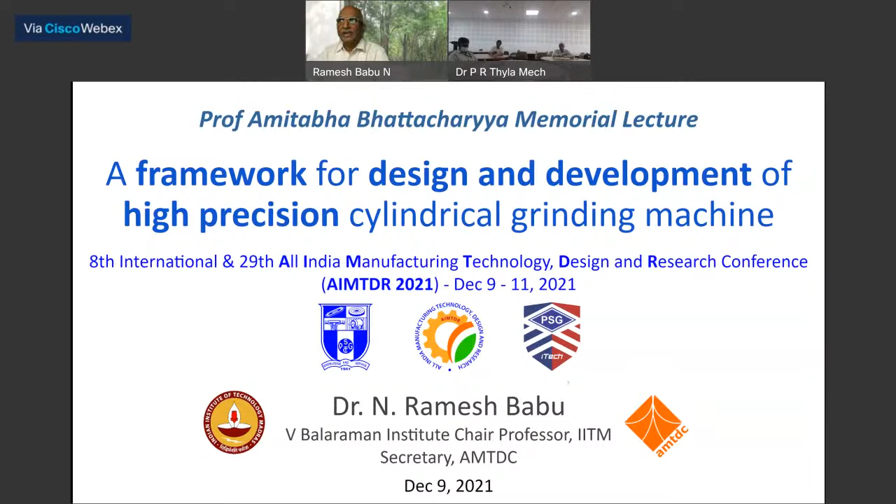I'm really honored to have you as the chairman of this particular session. I just wanted to briefly say a few things before I go into the talk, which I'm going to deliver in the next few minutes. At the outset, I express my gratitude to the organizers of the AIMTDR conference for having invited me to deliver the Professor Amitabha Bhattacharyya Memorial Lecture at the conference being organized by PSG institutions. I consider it a great privilege and thank all my colleagues for bestowing this honor on me.

According to me, the memorial lecture should really try to extrapolate, to the extent possible, what Professor Bhattacharyya would have said had he been with us today. I had known Professor Bhattacharyya as an eminent teacher and a distinguished researcher in the field of machine tools and production engineering. I happened to see him only once, at the AIMTDR conference in 1988, held at Jadavpur University. I have come to know that he had vast experience across a wide spectrum of activities, ranging from engineering education and research, through planning and developmental work, even to administration and management.

His research efforts in metal cutting and machine tools are very well known through the textbooks on metal cutting theory and practice, and principles of machine tools. These books are still considered among the best and are read by undergraduate and postgraduate students.

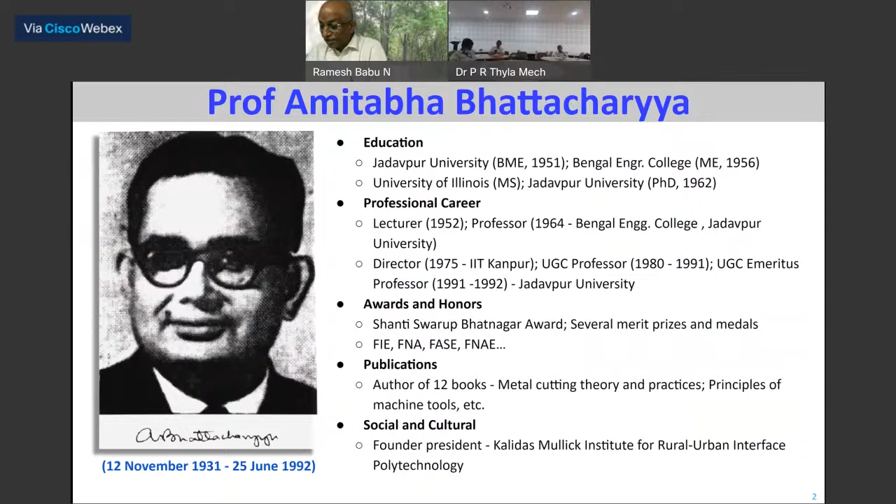I'll give an outline of today's presentation for the next 40-45 minutes. I would like to give a status of developing technologies known as mother technologies and mother machine tools, based on the report brought out by IMTMA in 2020-21, which is the basis for my introduction.

There are several other reports made available to us in the open domain, which one can easily look at. I'll briefly touch upon those, and also the efforts of many experts whom we have seen today as Lifetime Achievement Awardees, who have contributed immensely to bringing out those reports and the roadmap for the machine tool sector.

Then I will get into the project on which I have worked for almost 5 years, to develop the framework for characterizing the machine tool, and then use that same framework for developing this machine into a high precision machine tool.

This has actually taken us to the level of transferring the technology, and it was funded by the Principal Scientific Advisor's Office, with the team advising us and monitoring the activities from time to time.

At the end of this, I would also briefly talk about the transformational change we have brought about by setting up an Advanced Manufacturing Technology Development Center at IITM Research Park as a separate entity, and tell about the advances and changes we have been making in this area.

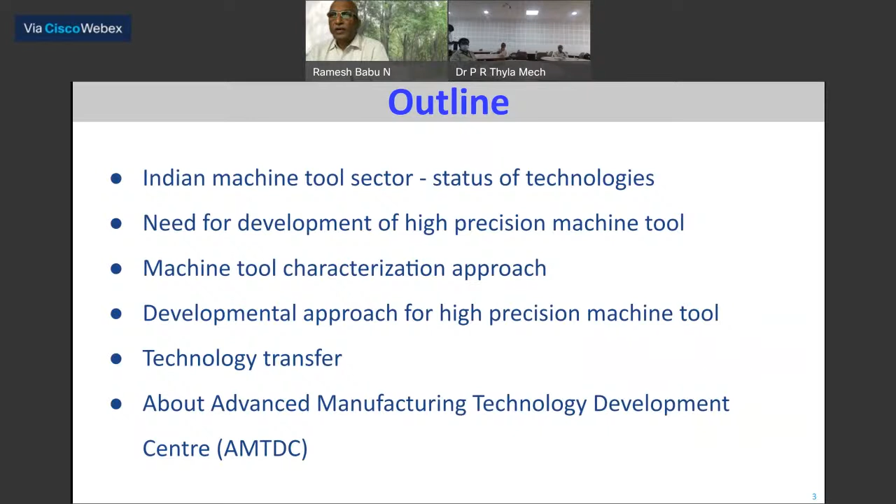This report I have taken from the IMTMA annual report, wherein they clearly brought out the level of dependence on imported technologies. These technologies are needed for building machines of different grades, right from the normal production grade used routinely in job shops and workshops, to precision and high precision machines.

In all these machines, what we need are certain technologies known as the mother technologies. They range from electrical, mechanical, electromechanical, and hydraulic, etc. I'm not getting into the details of them.

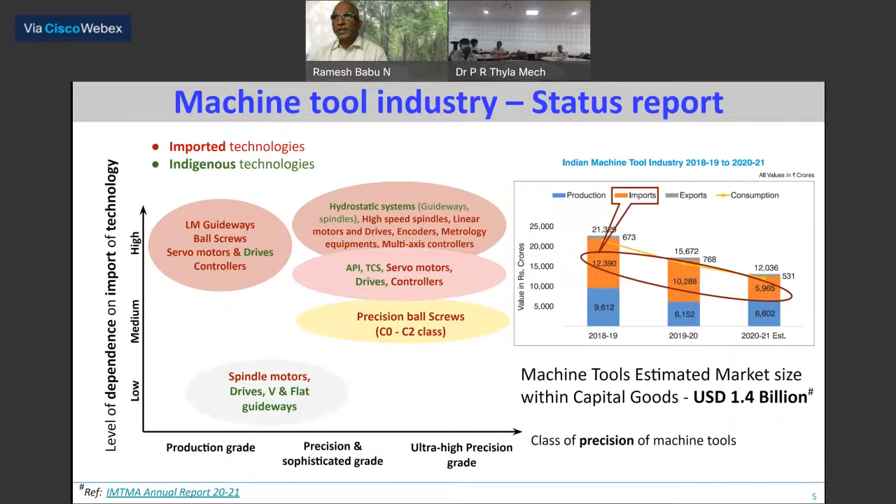So what it clearly brings out is that we need to really look at the way that these technologies are made available in this country to make these machine tools affordable by many, right from the low end to the high end machines. I think this is the basis.

If you look at some of the reports brought out by the Planning Commission under the 12th Five Year Plan, they have stressed the need to increase the depth in technology by way of industry-academia collaboration. Unless the academia looks at the problems of the industry and intensely takes it forward, we will not be able to build this sort of supply chain.

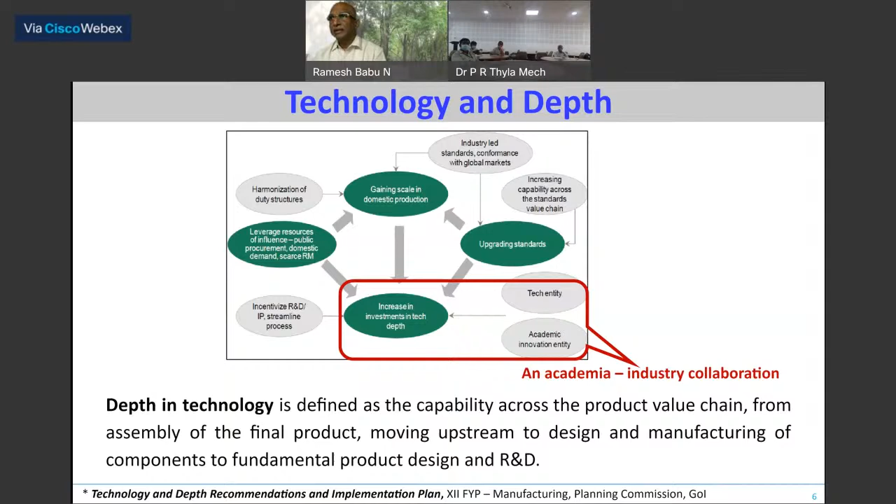That can look at design, manufacturing, and finally assembly and technology transfer. That's where the efforts are going on at the moment, and some of these efforts have been brought out in the technology roadmap, which clearly identified several technologies that need to be developed in this country. I'm not getting into those details, but those interested can easily look at this technology roadmap, which was brought out by the PAC and steered by members like Mr. Mohan Ram and Professor Mehta and others.

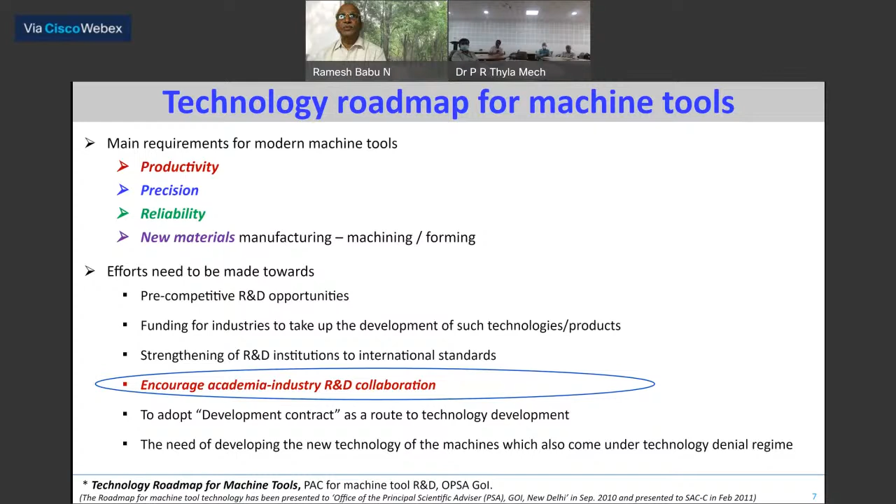One of the points here is to encourage academia-industry R&D collaboration for building the machines of the next generation, wherein productivity is extremely important apart from precision, reliability, etc. This particular presentation falls into one of those categories of building high precision machine tools.

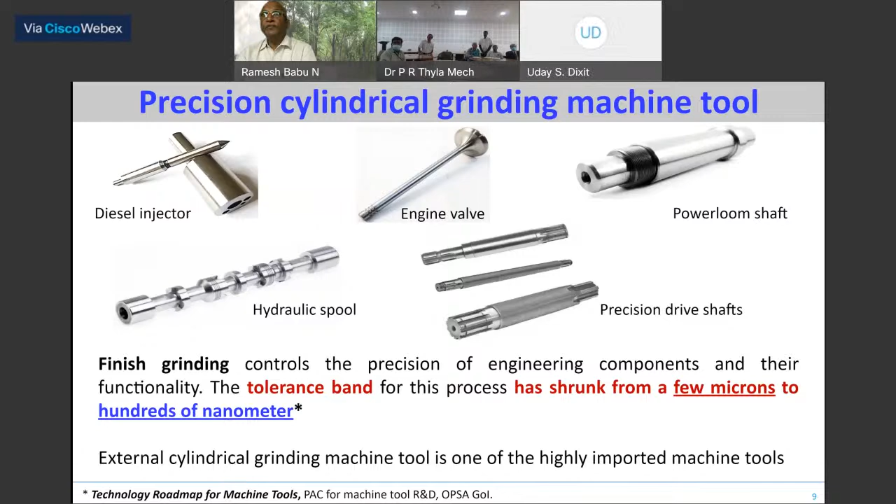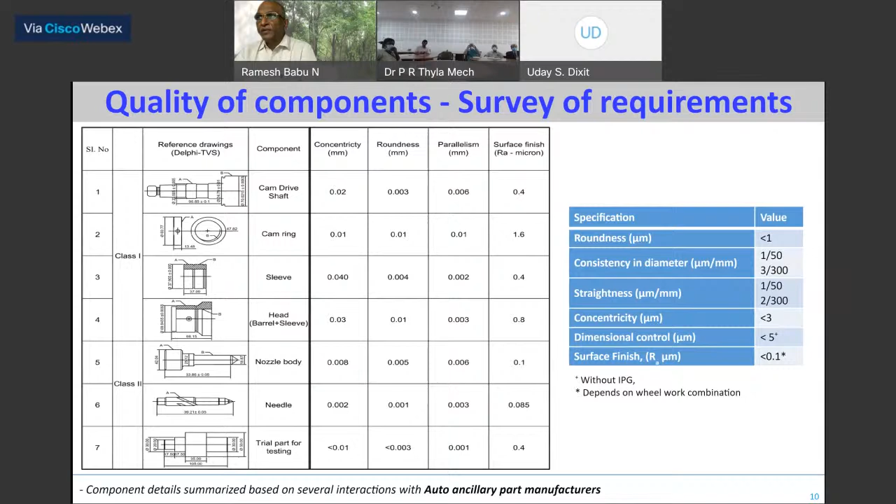That has really made us think of a grinder that needs to be either upgraded or modified into a next generation precision grinder. This was done in a collaborative mode with industry, academia, associations, and various other stakeholders who use these machines.

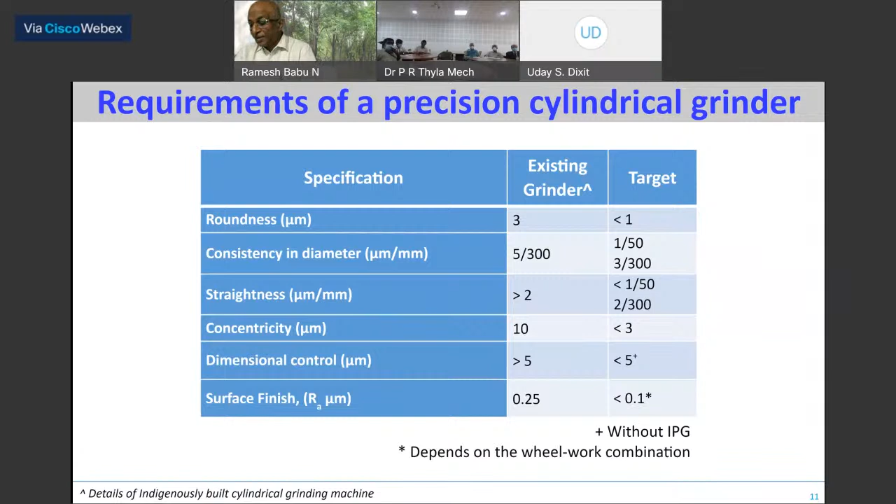That's where you can see the set of specifications known as the targeted specifications listed out in this table. As you can see, the roundness and concentricity are far lower than what we were producing in 2010-11. This was a project of almost 4 to 5 years duration, interacting with many industry partners and stakeholders who tested these machines and proved these concepts. The CMTI and the AIMTDF also played an important role in supporting this activity.

When we started, we were not very clear of what we had to do and how we had to proceed. But the industry partner, Micromatic Grinding Technologies, was kind enough to give us all the details which they had in building the machine. Our team worked with their team very closely and then brought out this anatomy as a building block, which can be used for subsequent projects also.

I'm not getting into the details of each and every module, because most people familiar with these machine tools know that the machine tool requires a bed, and over that a table and carriage, and on top a wheel spindle head, then the work head and tail stock, and of course the tooling. If that is the basis for making a machine tool, each and every unit is extremely important if you want to build the precision machine of the order we stated in the previous slide.

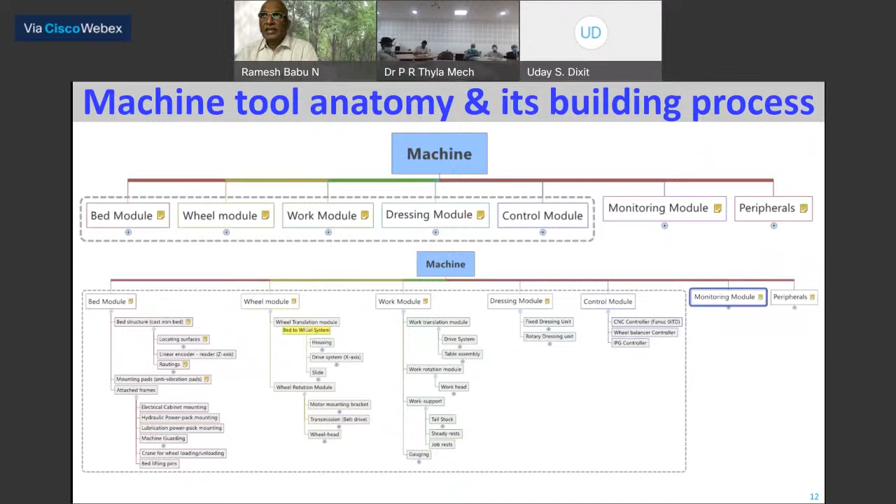So I think we felt that unless we characterize the existing machine and find out its weaknesses, and then benchmark it with a precision machine giving out the specifications indicated in the table of my previous slide, we need to bring that sort of an approach if we wanted to really build the next generation machines.

So what you see here is the effort that has gone into characterizing this machine. Grinding is a very complex process, with many inputs needed to realize certain precise outputs on the parts. This particular machine is a cylindrical grinding machine, where the tool and work interaction is extremely crucial to make the system precise and robust.

So let me use the pointer to bring out some of these. You can see the various inputs such as the mechanical system plus the tooling, and various other parameters such as the grinding and dressing parameters. All of them influence the quality of the part produced by the machine.

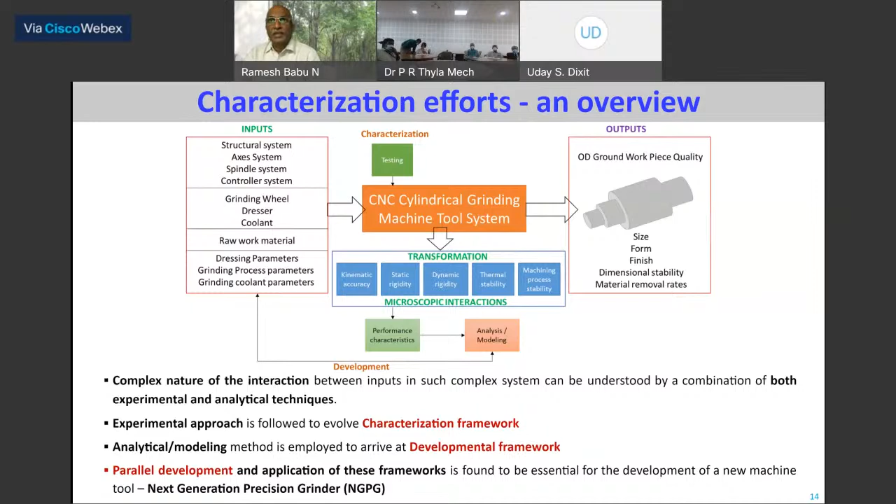I think this framework not only helped us characterize and identify the weaknesses, but also helped us use it for developing the next generation machine. I'm going to present some of these thoughts and efforts in the next few slides. So if you look at it as a black box, you will see there are certain inputs and certain outputs expected from a machine of high precision.

Inside this black box, you see the process happening between the workpiece and the cutting tool. This interaction is captured by way of four blocks, like geometric accuracy, the volumetric accuracy of the machine in the work volume, and its mechanical and thermal stability, or thermal rigidity.

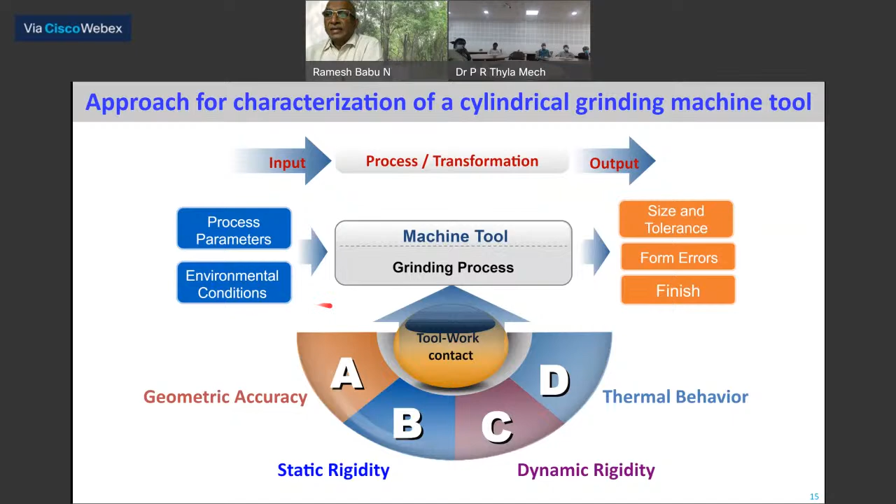These are the aspects which are seen to be extremely important if we wanted to transform this into a next generation machine. That's where the extensive study and analysis was made on the machine with only two axes.

But then, if you look at the bed from bottom, you have a table assembly, then carriage assembly, then wheel head assembly, then workhead assembly. These are the assemblies which use several components, and each component has to be machined very precisely. We need to follow certain assembly practices to produce those units in a very precise manner.

The information I have provided here is basically to find out the volumetric error in the work volume, which required both geometric as well as kinematic measurements. That means the error in geometric positioning, angular positioning, etc. Whereas kinematics means how the various units are assembled to bring out the parallelism and also the perpendicularity.

That required various measurements using laser interferometers and other instrumentation, and that will only give you accuracy in the static sense. But when you're operating this machine, depending on the conditions and material removal rates, both the static as well as dynamic rigidity or compliance of this machine also plays a vital role in affecting the precision.

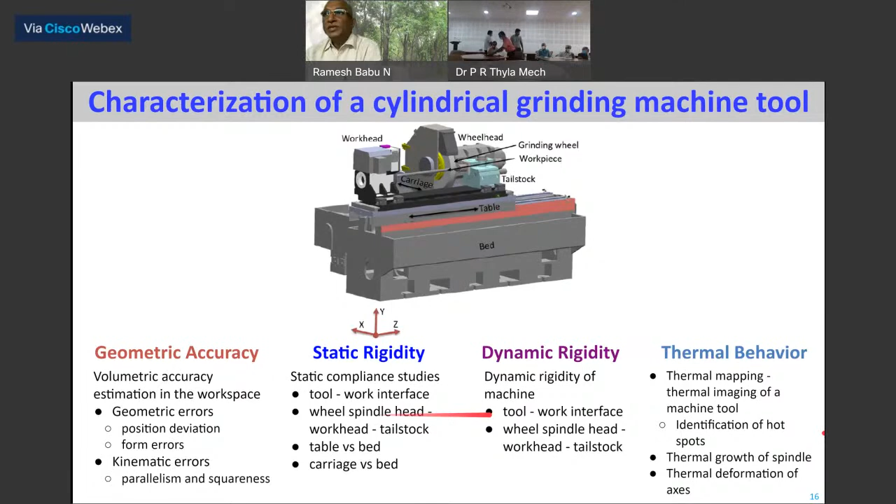The spindle and the axis are the ones actually moving the work and moving the tool, so the spindle growth is also very important to measure and compensate for. A lot of work has gone into this through a series of studies and efforts. These are the various aspects one needs to consider to really make a machine of high precision.

I just wanted to give you a flavor of what we have done, how we identified the weaknesses of the existing machine. This data relates to the existing grinding machine produced by the machine tool builder in 2010 and 2011-12. We found that the positioning accuracy itself is about 1.6 microns over 300 millimeters. But we are aiming to build a machine with less than 3 microns, less than 5 microns. You can easily imagine these accuracies are not going to produce high precision components on this machine.

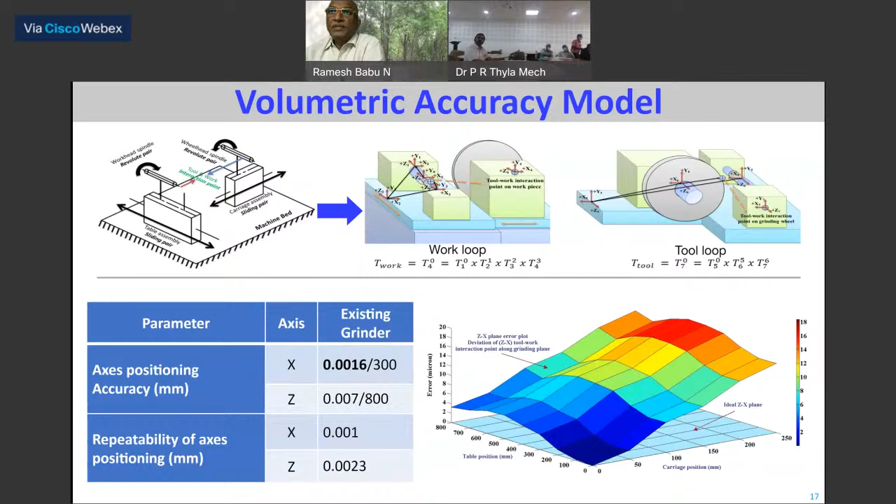So we took this information and attempted to build a model which is helpful for us to do sensitivity analysis and identify the root causes for the inaccuracies. The same thing will also help us improve those areas where precision as well as accuracy can be enhanced. So that's one side.

Then the other one is the thermal characterization. While characterizing this machine, we found that no two results are similar. We found that the drift of the spindle and the growth of the axis give very different results from time to time. This really made us look at it in a holistic way, and we see thermal characterization as the most important and crucial aspect in precision machining and precision machine tools.

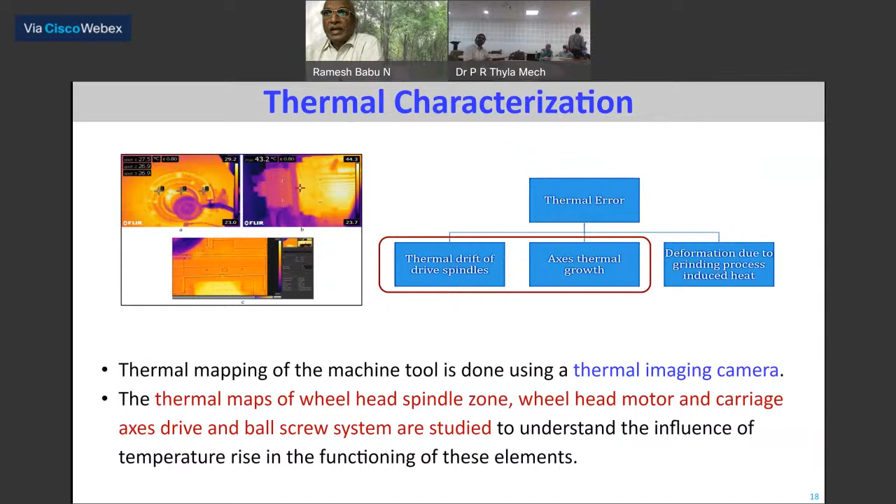This is where one would notice that if you look at this sort of error, about 15 microns is the error. You can see the growth with respect to time - it took almost 300-odd minutes for the entire temperature on the wheel head to come to a stabilized mode. T1, T2, T3, T4 are the points on the wheel head housing, and when we monitored the temperature, we simultaneously monitored the drift of the spindle.

We monitored this using the spindle error analyzer. We found that in the existing machines, it takes about 3 to 5 hours for the machine to get into stabilization.

I think that's going to be too long, so we felt that we need to reduce these times also if you wanted to utilize these machines more usefully.

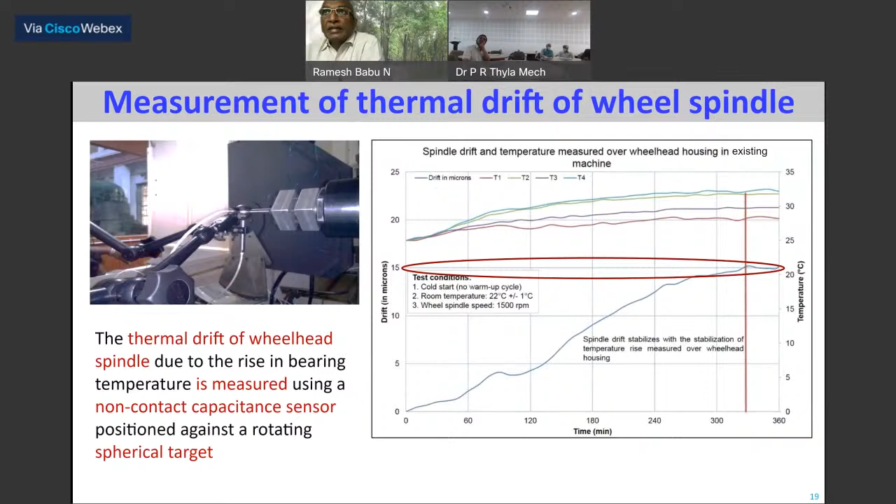I think the second one is the drift which I mentioned on the axis itself. This is only a 2-axis machine: one along the table and the other along the carriage. These two axes we monitored.

We also saw that the wheel spindle head itself is driven indirectly by means of a belt drive, and that is really causing this entire carriage and the other units to have this sort of deformation.

The first two, like volumetric accuracy, which used only the geometric and kinematic error, gave us some information about the machine and its behavior. But the thermal characterization has thrown more insight into how the machine is behaving, due to the construction and the way the various units were placed. These are the insights we got by means of the study.

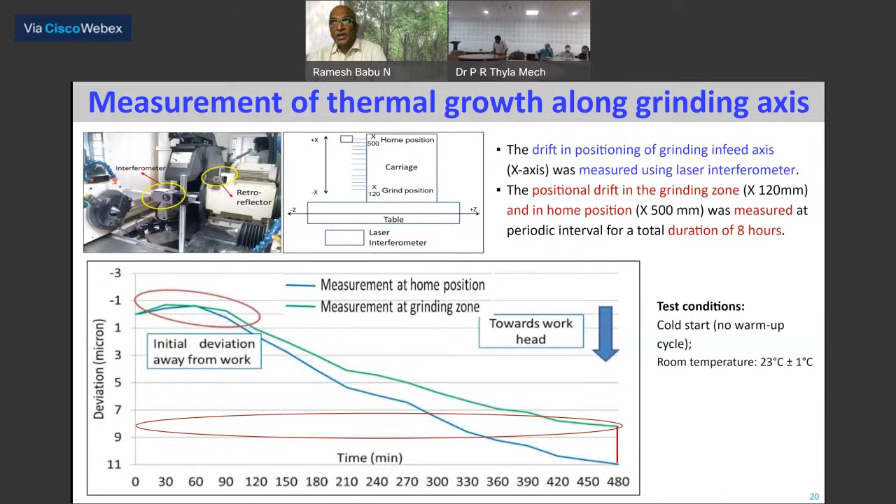But then we thought that in order to have completeness for the project, we also felt that the structural and mechanical rigidity of the system has to be assessed. So we carried out certain tests, and some models were built to provide this as the base framework which can be used in the inverse mode to come up with suggestions.

Though the dynamic studies have not offered much, it was still useful for us to conclude that the machine base and the other units have enough rigidity for the machine to withstand all those loads and the speeds.

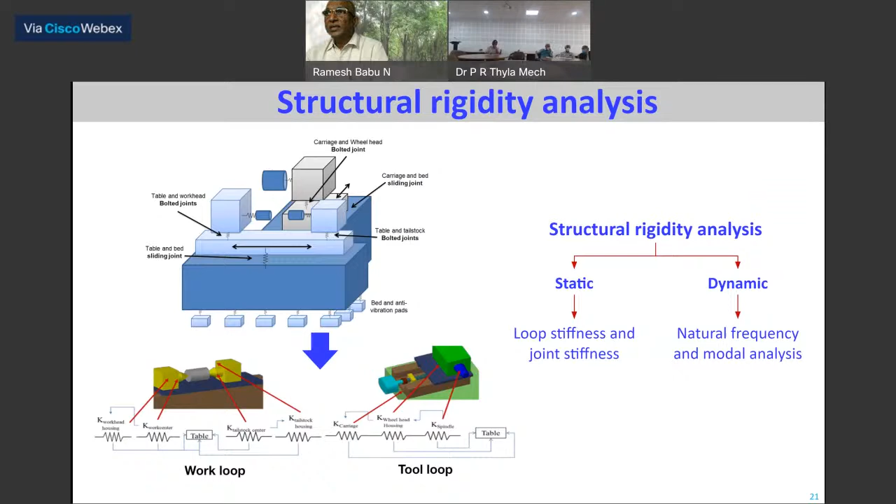Now, of course, during this process, we did develop some models that identified the manufacturing practices being followed by the machine tool builders in terms of the tolerances and allowances provided on various components.

Some of the models are basically tolerance stack-up models and tolerance synthesis models, which help us allot the tolerances on different components of each assembly, such as the wheel spindle head assembly and work head assemblies, etc.

At the same time, this model incorporated the various mechanical properties of the components and joints and the various units which are moving in relation to each other. That also gave us some confidence on how to really design the systems.

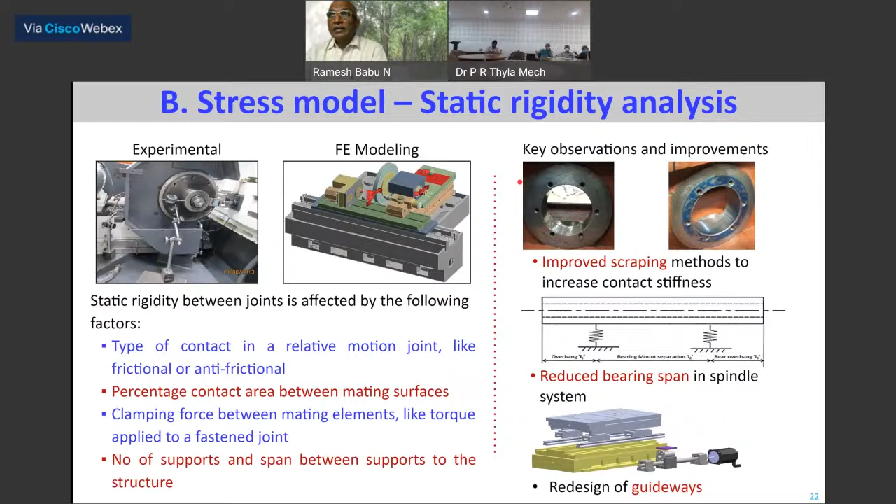I think the dynamic rigidity, as you can see, we developed this sort of finite element model to ensure that this model can help us in the future.

At the same time, with experimental modal analysis, we gathered data about the machine and the machine structures, using the standard methods of the hammer with accelerometer placed at different locations. We found from this data the mode shapes at different frequencies.

Normally the spindles are operated at about 3000 to 5000 RPM, so the frequencies will be in the range of 50 to 80 hertz. It's only a rigid body deformation without any bending or twisting. Hence we concluded that this machine has good rigidity as far as the mechanical properties are concerned.

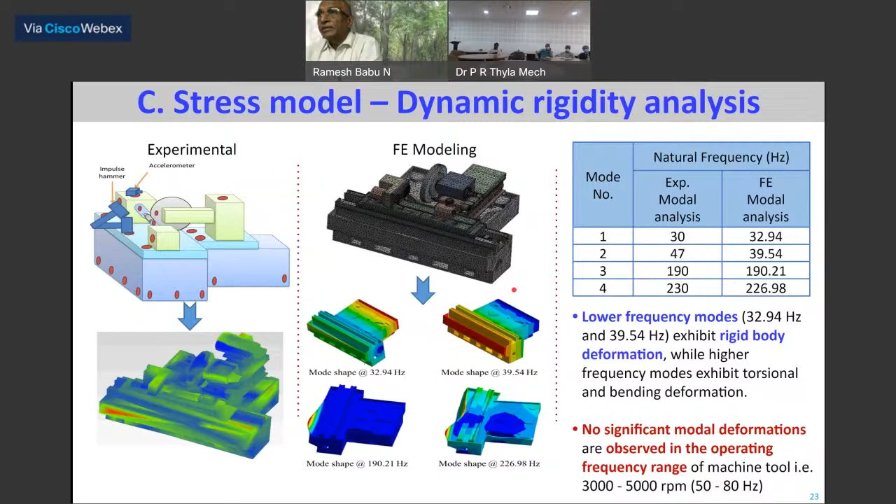So the entire effort is basically to characterize this machine and identify the various areas that can be improved.

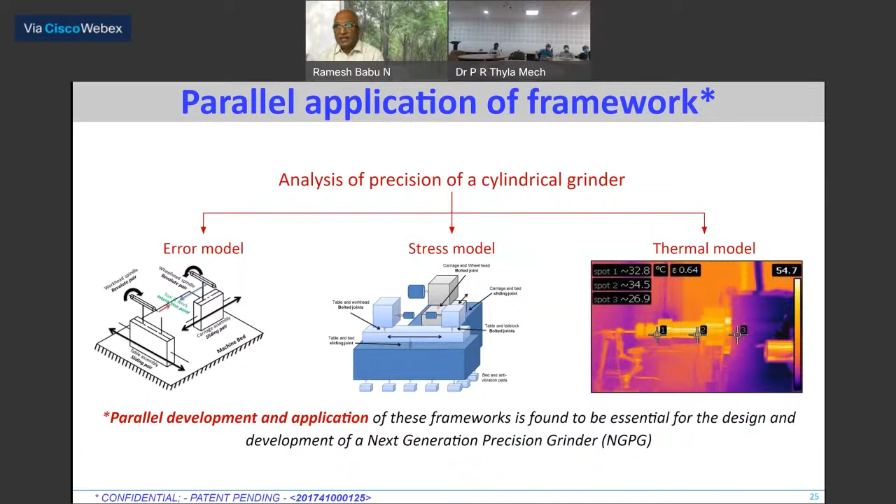We used the same approach to build several models and integrate them into a framework, bringing them into different categories such as the error model, where volumetric accuracy is the main concern, the stress model, where static and dynamic compliance of the machine is of utmost importance, and the thermal model that covered both the drift of the spindle and the axis, so as to plan and implement those compensation strategies.

We can also identify the major components that affect volumetric accuracy through sensitivity analysis. This particular error model really helps us identify the areas of improvement, and that's where we came up with suggestions on the design and assembly of various units.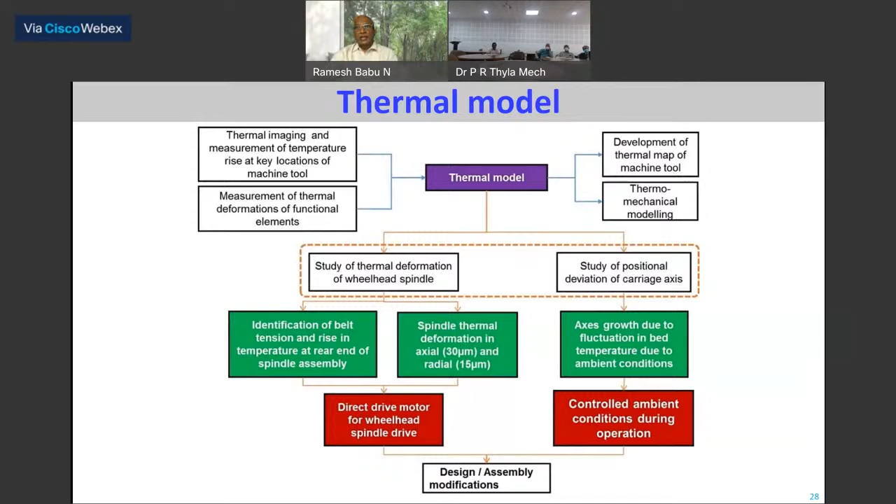This entire effort is essentially a combination of both experimental and analytical methods, which we don't normally do while taking up any project. Usually we look only at factor improvement methods—if we improve stiffness or thermal stability, these are seen in isolation.

But this particular project dealt with all the components of both static and dynamic aspects of the machine tool, which made us build this framework and helped us come up with suggestions. These suggestions were implemented, and we tested the machine after it was fully built.

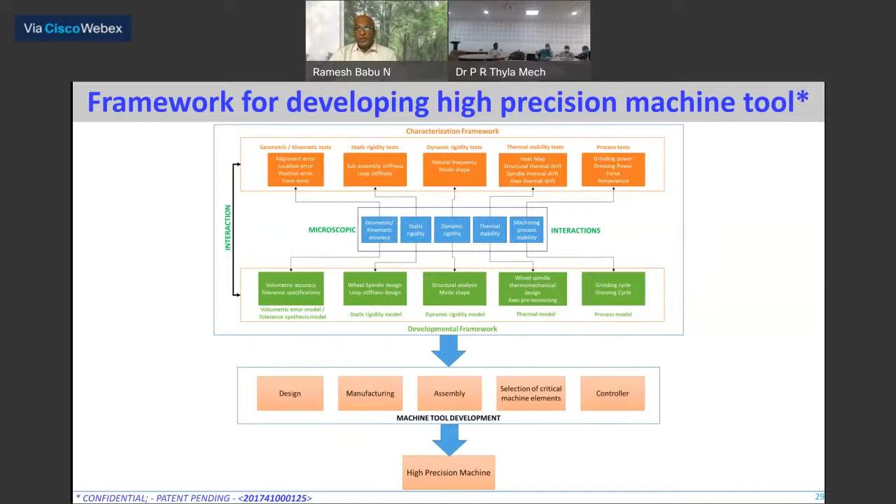Even the trials were carried out in an exhaustive way before the entire machine was proved to be a high precision machine. Now I'll show you some of the suggestions we came up with.

If you look at the diagram on the left hand side, about 75% of the errors are due to thermal drift—this is only the spindle drift itself—but axis positioning error is about 20%. The errors due to other things, such as static and dynamic compliance of the machines and process related factors, are very, very low.

This suggests that we need to focus more on thermal compensation aspects over other aspects. We also suggested certain changes in order to make these machines easily reproducible.

One thing we noticed is if you use V and flat guideways, the time taken for scraping and making alignments takes more time. So we felt that linear motion guideways could really reduce the time for building this machine tool.

The ball screw pretensioning has reduced deformations to a certain extent, and the direct drive spindle has also helped reduce deformations caused by the overhanging of the motor driving the wheel head spindle.

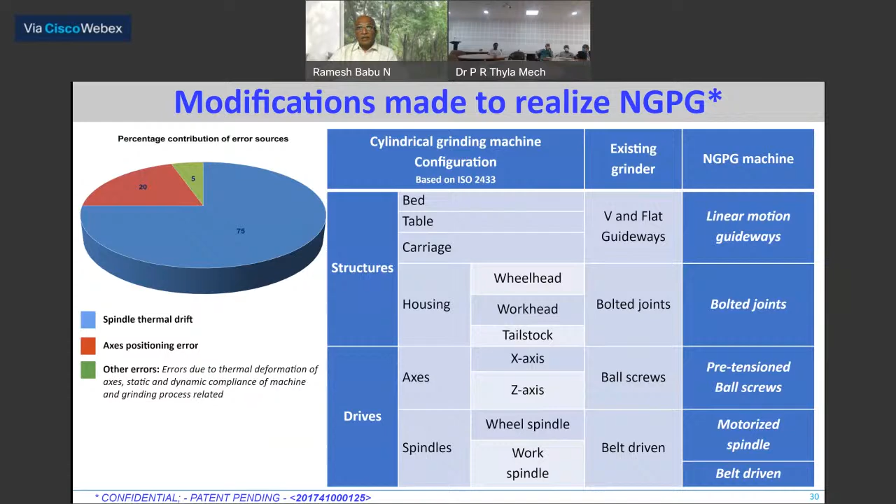This is the machine that was inaugurated by Dr. Chidambaram, who was the principal scientific advisor at that time.

We further evaluated the various parameters in order to bring out a comparison between the next generation precision grinder versus the existing grinder.

This table clearly shows that axis positioning errors have been brought down from 1.6 microns to 1.9 microns. Similarly, in both axes, the backlash was also brought down to 0.2 microns, and the step response using the LM guideways has also significantly improved.

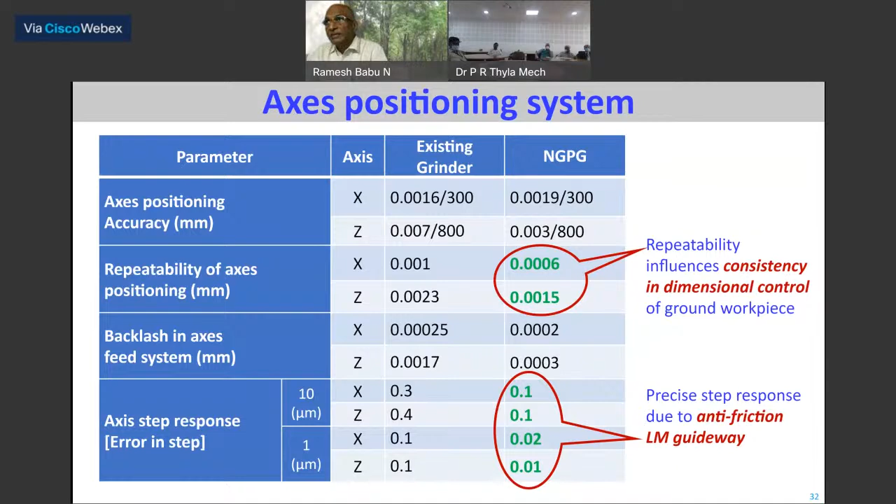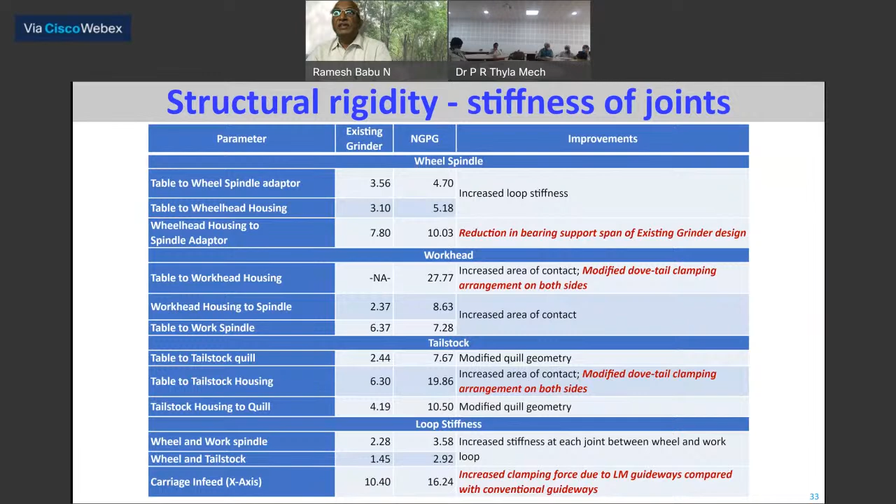So why I'm showing this one is, when we didn't have any data about how to build a machine tool, this approach has really helped us to bring out the framework and evaluate the capability of the machine. The static as well as dynamic stiffness of this machine has improved substantially. What you see here is between different components for each of those assemblies, such as the wheel spindle head, work head, etc.

This particular diagram shows two aspects. I have put these arrows here, and if you look at this one, this is about 7 to 16 microns error. And here you can see this 19 microns on the x-axis and z-axis about 26 microns. This error can be brought down to 6 in the x direction and 18 in the z direction.

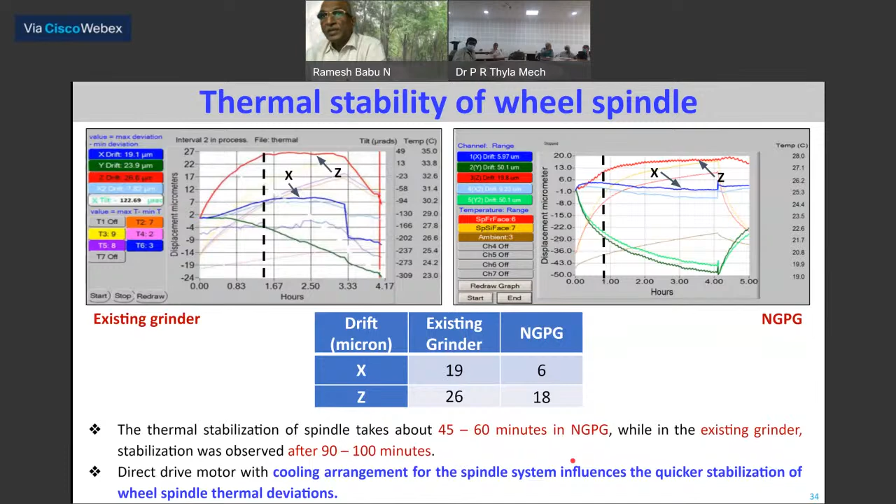We have made several changes in the spindle system by providing cooling jackets for it to stabilize quickly. And we have also used direct drive instead of indirect drive for reducing the thermal deformations, etc.

As you can see, this is the linear axis growth, with the x-axis shown here for the previous machine versus the new machine with the modifications. And this has also improved the tolerance grade substantially.

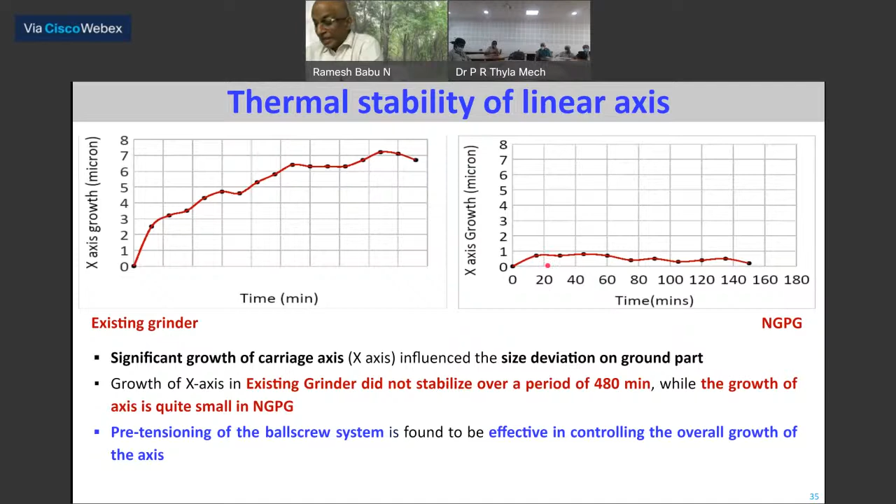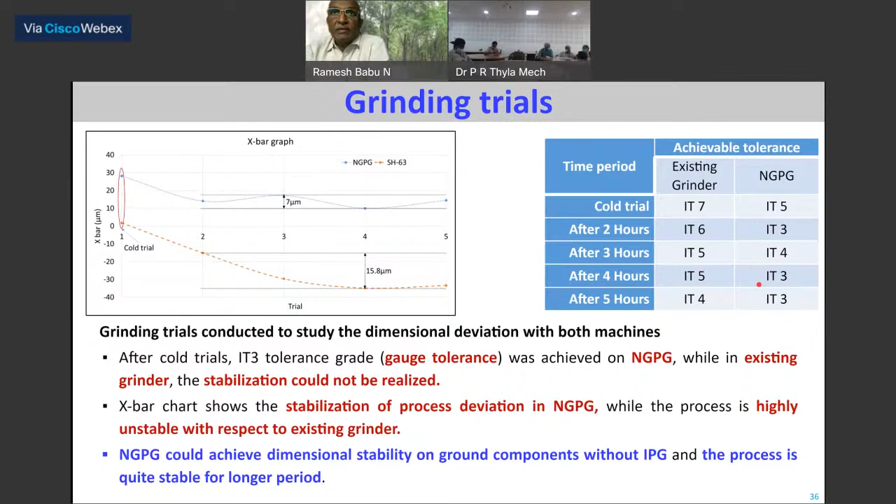Those studies were carried out after the completion of the machine building, using the tooling and fixturing for grinding different types of components taken from different industries. I wanted to give you some insights into the various trials carried out on different components. As you can see from this table, the achievable tolerance grades have been improved substantially with this machine having undergone several changes at various units.

What I wanted to convey here is that this approach is basically an approach of characterization which has resulted in the development of several models. These models are integrated to build this framework, which we call the characterization framework for assessing the capabilities of this machine. The same thing can be used in inverse mode as a developmental framework, as we have seen in some of the models.

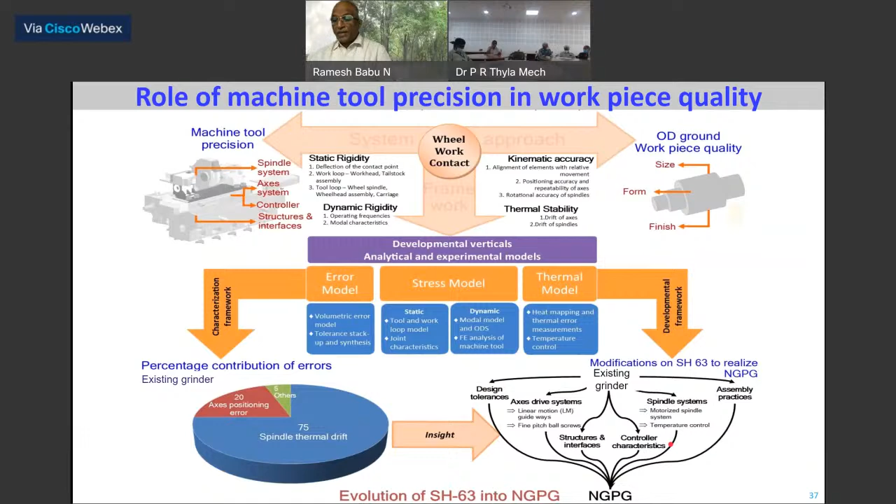So hence, by characterizing and using these models, it is possible for us to come up with some suggestions, and even these suggestions were implemented by our partner to build this next generation machine. Some changes have been made on the spindle side and the structural interfaces. Some redesigning was attempted, and geometric accuracies were also improved, and the drive systems were modified using different types of elements such as LM guideways and ball screws with fine pitch and pre-tensioning, etc.

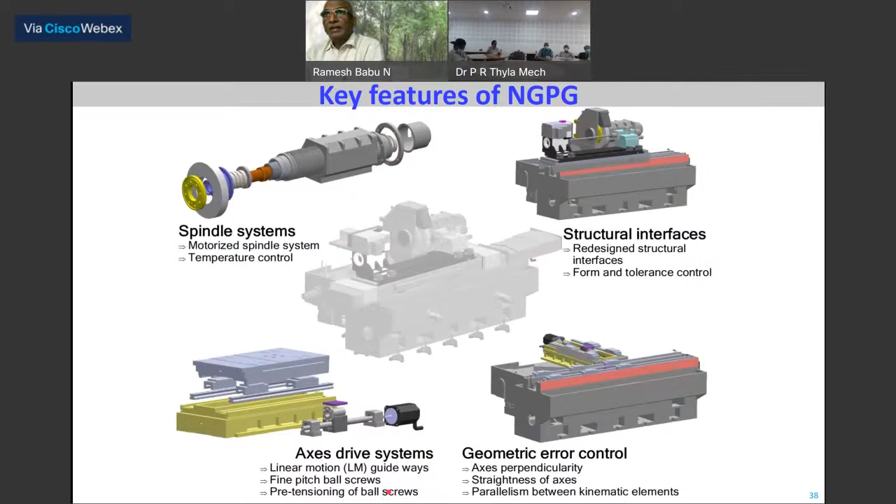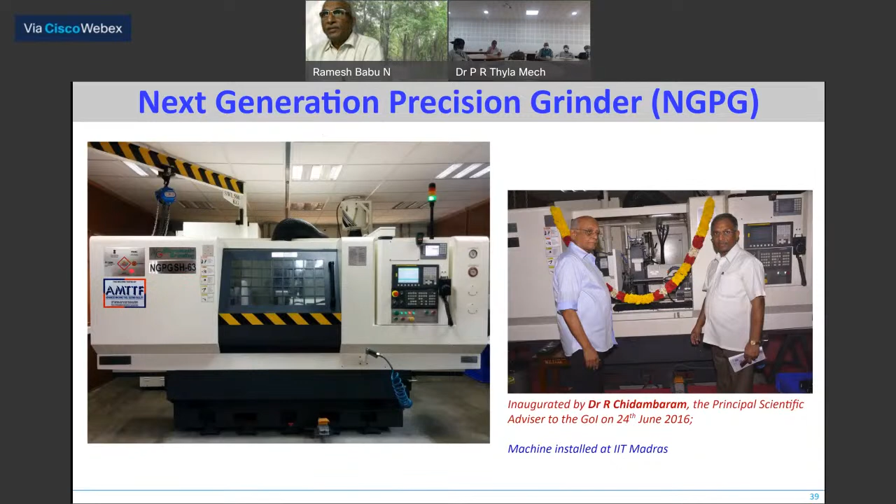So this is the machine. It's a collaborative effort, not the effort of one academic institute alone. I think you can see a couple of slides illustrating the capabilities. As you can see, the various terms are given here, and we have been able to bring it to this level of IT3 grade with the parameters.

That means whatever we set out at the beginning to produce certain components using high precision grinding machines, we have been able to achieve. This data was collected after carrying out extensive trials on different components with the tooling and fixturing.

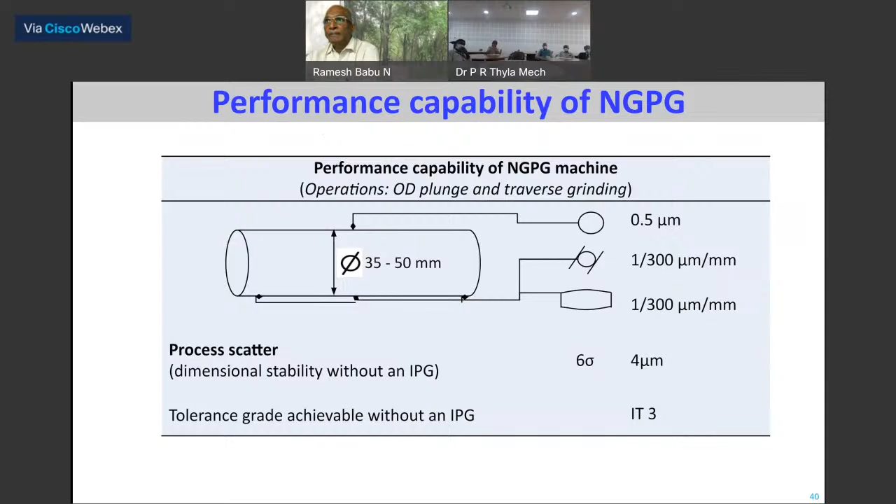So as you see, starting from the requirements and then creating a framework and building a machine, and proving the entire capability by considering components from different industries, has enabled us to transform this machine from one level to the next level, where the improvements are quite substantial. This has resulted in the transfer of technology after almost 1.5 years of machine building and installation.

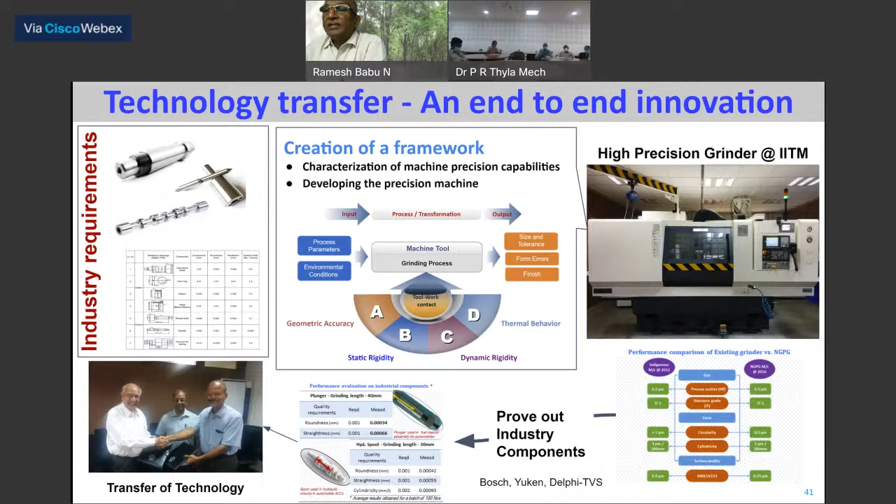So why I'm saying all this is to show where you can really bring in transformational changes in manufacturing, which is the theme of this conference, and we hope that many academic institutions and R&D units can learn something from this presentation and utilize this framework, or follow this framework.

When we got this particular project sanctioned by the Principal Scientific Advisor's Office, we were not quite sure what we were going to do. Were we going to assess the status of the machine and leave it there? Or identify the strengths and weaknesses and keep it in the report? Or utilize these technical pathways and framework for building the next generation machine?

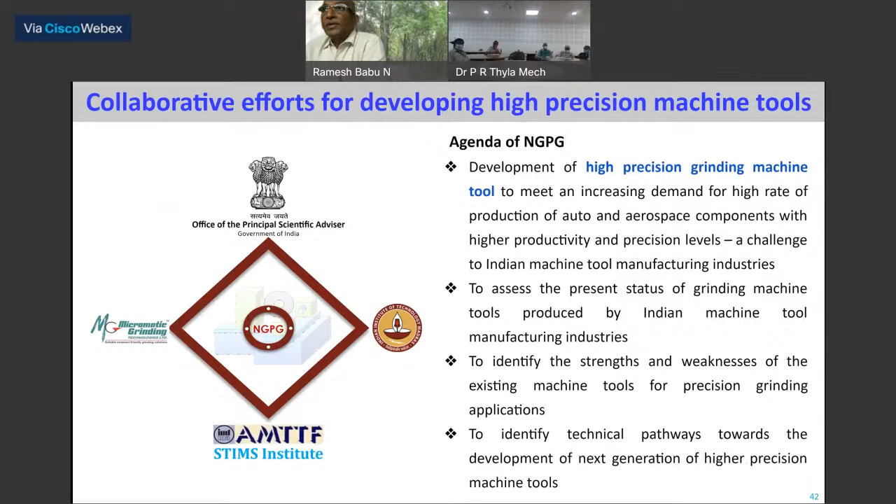I think this is where the collaboration really helped us bring different minds with different capability sets and expertise to help the entire team. Associations like IMTMA and testing facilities available at CMTI, advisors like Dr. Subbu from USA, and partner industry like Micromatic Grinding, all of them played an important role in building this framework. I need to acknowledge all of them who have really supported.

Professor Mehta was chairing the committee and Mr. Neeraj Sinha was the convener. The members were drawn from associations and industries, and also from R&D establishments, IITs and R&D organizations. I think these are the ones who really drove us to the point that we need to build this as a unique framework, and also make this machine into a next generation precision machine.

A large number of students worked on this project without any frustration or fear. I need to acknowledge them, and all of them are positioned very well in various universities abroad and organizations in India. The amount of knowledge that they have created and generated is what has really led us to the next level of building the advanced manufacturing technology development center. I profusely thank all of them for their efforts and contributions.

Today we have this center at IITM Research Park, which again is an initiative of the Government of India. Mr. Mohan Ram already mentioned in his speech about MHI's initiative in enhancing the competitiveness of the capital goods sector. The industry partners have come forward to give their contribution without any hesitation, though we had some hiccups initially, but finally we've been able to receive the contributions from them also.

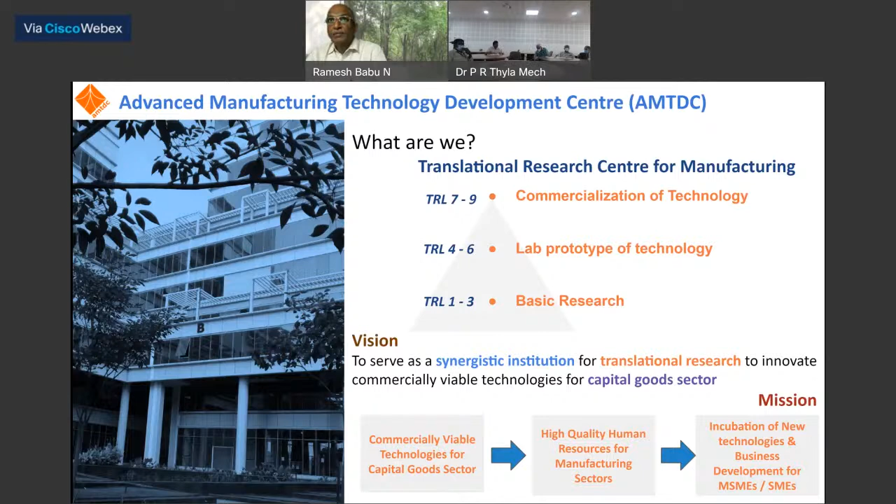What are we? Basically, we do a lot of research at academic institutions and then leave it at the lab prototype level. That's what somebody called the valley of death. In fact, our chief guest was mentioning about TRL 4 to 6 - you just leave it there. But at this particular center, we wanted to transform this into a commercially viable product through a collaborative effort in a mission mode, rather than leaving it at the laboratory level as a prototype. This is what I just wanted to convey.

I think I took about 45 minutes to complete it. Thank you very much.

Thank you, sir, thank you very much. Sir, can you see us, Dr. Ramesh Babu? Yes sir, can you see me? Yes, very much so. Neeraj Sinha, Mr. Mohan Ram, Dr. Mehta, we are all sitting here. I think thank you very much for your support. I just wanted to personally congratulate Professor Mehta ji and Mr. Mohan Ram. Can you see me? Yes, we can see you. I think it was unexpected - even on Saturday I told Prabhu Raja I will come, and I spoke to Professor Mehta ji and Mr. Mohan Ram that I'll definitely come. But this was most unexpected, which took place on Sunday, so I thought I'll just keep for some more time to carry on some more rituals here.